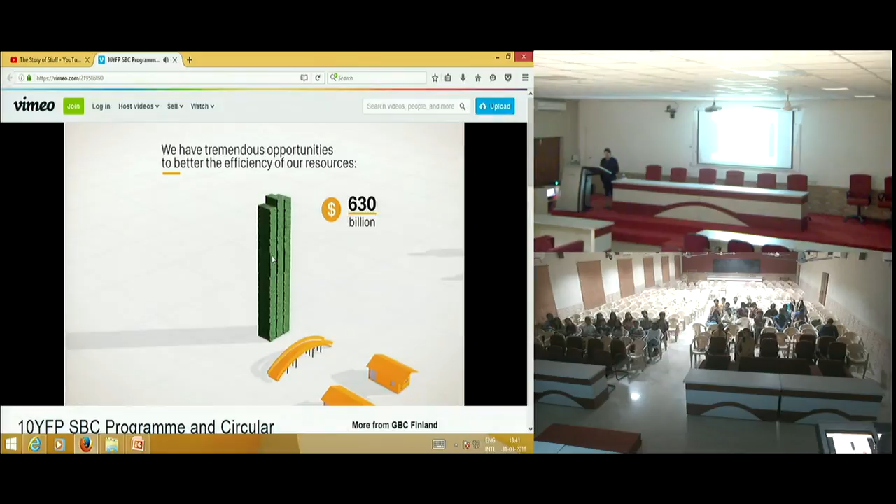10 to 15% of building materials are wasted during construction. 60% of European offices are not used even in working hours. 50% of residential dwellers report living in too much space. 20 to 40% of the energy used in existing buildings could profitably be conserved. 54% of demolition materials are sent to landfill, while in some countries landfill is only 6%. And 40% of all extracted materials are stored in the built environment, which provides an enormous reservoir for reuse and recycling. EU manufacturing could realize net cost savings of up to $630 billion annually in raw materials by deploying a circular economy approach, and applying circular economy principles could significantly enhance the productivity of the global construction industry, saving at least $100 billion a year.

The Sustainable Development Goals of the SBC program are to achieve a healthy built environment, provide capacity building to different stakeholders, increase water use efficiency, ensure access to affordable, reliable and modern energy services, improve resource efficiency, promote sustainable industrialization and foster innovation, support job creation for all genders and the youth, enhance the planning and management of sustainable human settlements, encourage companies to adopt sustainable practices, strengthen resilience and adaptive capacity, restore degraded land and ensure sustainable use of ecosystems, and finally, build on initiatives for knowledge sharing and cooperation.

Our vision is a local circular economy: analyze global material flows to inform local networks and design buildings for material recovery, lower the cost of waste separation, replace energy-intensive materials and save raw materials, protect the informal sector and encourage the use of organic building materials. Invest in local circular economies and divert materials from landfill, raise the value of reused materials and improve the prospects for the informal markets.

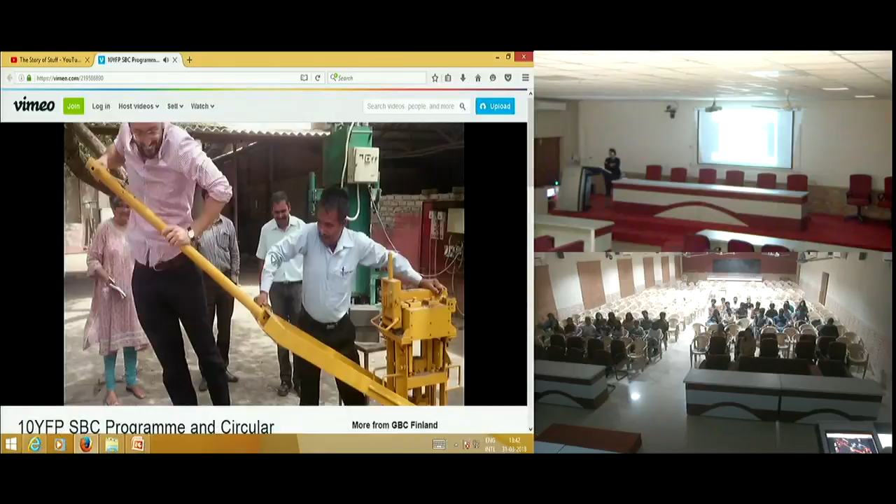A good example of using side streams from other industries in construction comes from India, where fly ash is used to make building products for walls or pavements. Machinery of different scales is available for startup companies. The Helsinki Maapörssi in Finland is an online recycling service to facilitate and coordinate the direct exchange of demolition aggregates and ground-fill materials. In Malawi, the use of traditionally fired clay bricks can now be substituted with a more environmentally friendly eco-brick, manufactured with vertical shaft brick kiln technology, which reduces the consumption of firewood and deforestation. Visit our SBC program website for more information and get in touch.

Okay, so I hope you found that video useful. Now coming back to the built environment, as you saw in the video quite clearly, we do need the built environment, and I said this before, we do need the built environment for resources that we use, and then we tend to put our waste back into the built environment as well.

And in the process of putting waste back into the earth, we could contaminate things. You know, there's air pollution, there's water pollution, there's pollution to the soil. So in other words, we also need to be careful about the sorts of materials that are going back into the earth. And when you look at particularly in urban areas, and particularly in countries like India, the pace of change, the urban growth that's taking place is unprecedented.

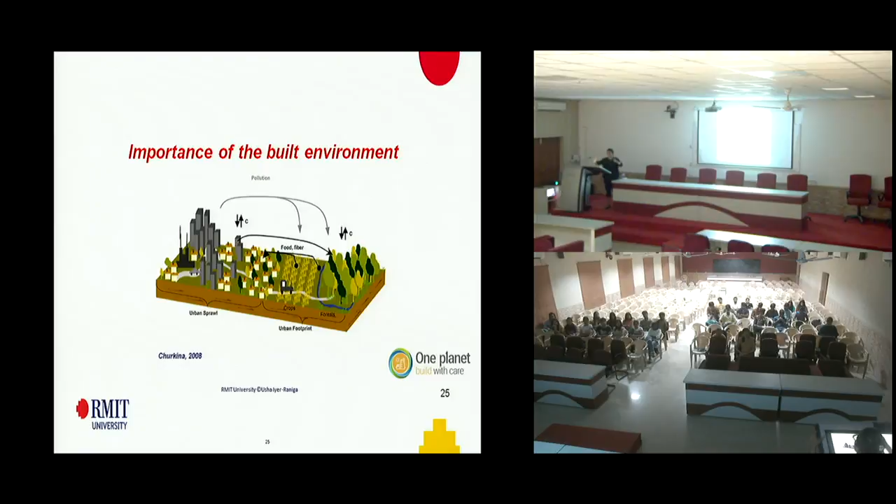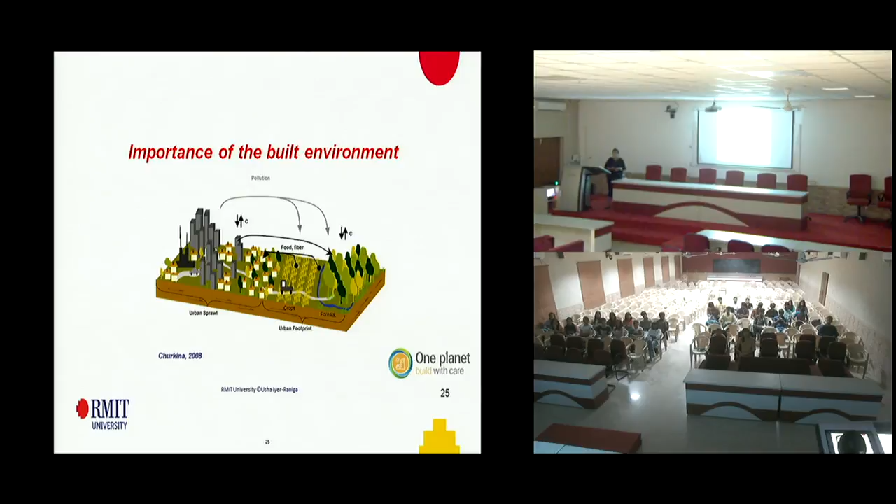also maintenance, because buildings need to be maintained over a period of time, like you might give it a lick of paint, you might need to change your roof tiles, there's a number of things that you do to the building. So this whole process, the total life cycle needs to be much lower than what we have traditionally been using over a period of time. So if in this process we can try and bring back the principles of circular economy, then we will all be winners in the process. So I hope that's clear to you.

So that is why there's a lot of focus now on cities, because if you look at the population of the world, nearly 7 billion people on the planet, about 50% of people, particularly in countries like India, China, Brazil, Mexico, Philippines, if they're not already living in cities, they will be, and particularly the Asia Pacific is going to be where 50% of the world population is going to be living by 2030.

So there's a huge focus, therefore, on how do we build cities. And that is why we need to start thinking about the principles of incorporating sustainable development into what we do. So let me now show you very briefly about India's commitment to the Sustainable Development Goals.

And I want to bring you back to something that is not new in India, and that is Gandhi's comment, which he made many years ago, where he said, "Earth has enough resources to meet people's needs, but will never have enough to satisfy people's greed." And unfortunately, the developed countries in this world have followed the path of people's greed rather than people's need.

And so we are now in the situation where, if you get an opportunity to see An Inconvenient Sequel, the sequel of An Inconvenient Truth, you can see in the movie how countries like India have negotiated very strongly to ensure that they have the opportunity to continue to grow, but at what cost, and how do we achieve that growth without damaging the environment on a permanent basis.

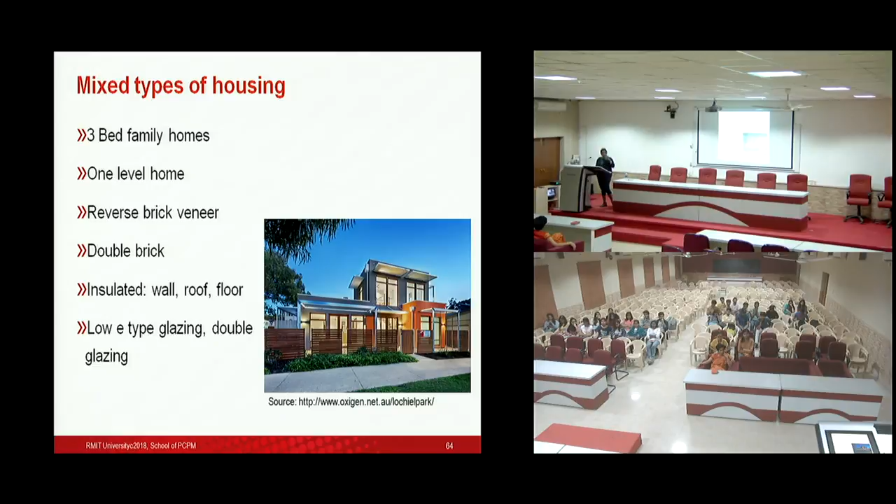They also use low E glazing, so that the window itself doesn't absorb sunlight, particularly in summertime. And a lot of double glazing was used. So again, that keeps the heat in during winter time.

Here is another example of what is called Josh's house. So I have to explain this to you a little bit. So Josh became a celebrity on the national broadcaster, ABC, the Australian Broadcasting Corporation. We have got ABC radio, we've got ABC television. And so he became committed towards sustainability, and he wanted to build a house. So the whole process of him building this house and monitoring his house became a television series.

So he went to a NatHERS 10 rating, and then he used natural light as much as possible, so he didn't need to use artificial lighting during the day. And he used LED fittings in his house, and then he used energy metering and other savings. So the typical energy use of Josh's house was about 1,000, or maybe even less than that, whereas a standard Perth house was about 9,000 kilowatt hours per year.

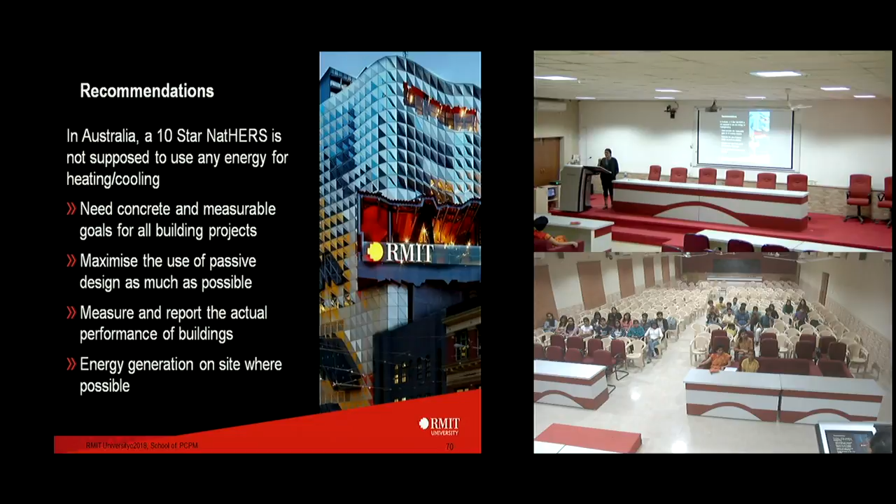And wherever possible, try and have energy generation on site. I also want to show you this project called Nightingale, which is a fairly recent project where one of my colleagues was involved in. Housing affordability is a huge issue in Australia.

And the price of housing has increased so much, particularly over the last 10 years, that a lot of young people who are earning money are just not able to get into the housing market at all, because on an average the cost of a house should be about 3 times a person's salary, right? So the average salary in Australia is about $60,000. So 3 times that should be $180,000. So say $200,000 should be the standard cost of a home.

Now you saw already in Josh's house, which he built, where are we, 2018. So he would have built his house at least 6 years ago, maybe even earlier than that. And it was already about $400,000, say about $380,000. So even 6 years ago, and Perth is much cheaper in terms of housing compared to Sydney and Melbourne.

So now a typical average home in Melbourne, and when I say an average home, I'm not talking about a flat, I'm talking about a 3 or 4 bedroom house, is going to cost you, if you're looking within the inner suburbs, so about say 10 kilometers from the central business district, about $1 million, $1.5 million. That is clearly unaffordable for somebody who's on a $60,000 salary.

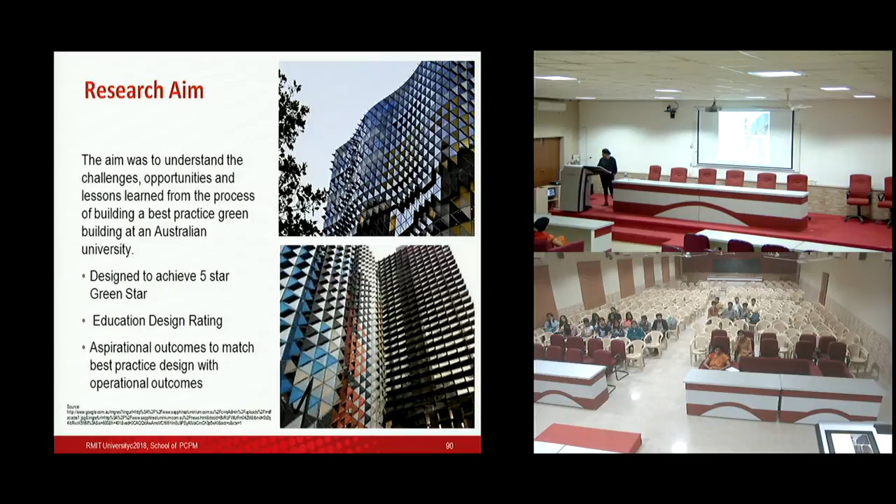So we used a case study methodology, and it was a mixed method. So we used quantitative data as well as qualitative data. So in terms of the quantitative data, we measured the building. We also had a building management system, so we cross-checked that. We actually also put in physical measurements, so we put HOBOs, and we looked at lighting, we looked at the temperatures, a whole range of different things, relative humidity, all of that. And then we also looked at how people felt in the building.

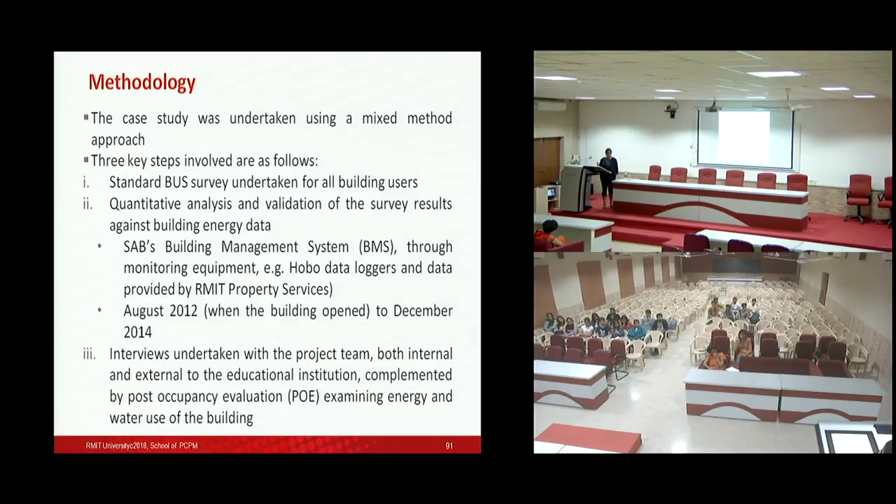So we used what is called a BUS survey, a building user survey, and we also undertook interviews with the project team, because we wanted to know what they were thinking and whether they felt the building was successful from their perspective or not. So we did semi-structured interviews with 17 different people, the architect, the project manager, etc. And with the building user survey, we did not use students, so we did not engage with 6,000 students for a number of different reasons, which I won't go into. But we thought that we would look at the permanent users of the building, which are the staff and higher degree by research students, because they're usually there.

They're meant to be there only for 3 years, but they usually stay there for 5 years. We initially sent out soft copies to people, but we found that the response was very poor. So we then gave them hard copies, and we had about a fifth in terms of the response rate.

We also looked at the utility data. So what was the energy spent? What was the water use in the building? What is the gas use in the building? And so we then triangulated: the BMS data, our own data, utility data, and then we also spoke to property services.

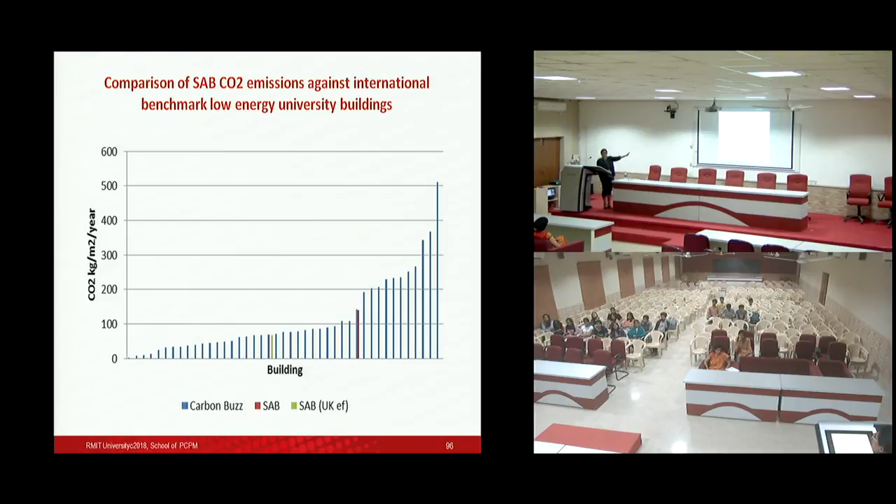So in terms of water consumption, it had 61% lower water consumption compared to other RMIT buildings, but still not meeting its Green Star target. From a greenhouse gas emissions perspective, it was 3.5 times higher than the predicted rate. So as you saw, the energy was not what was either in terms of its design intent or even what it was as far as Green Star was concerned.

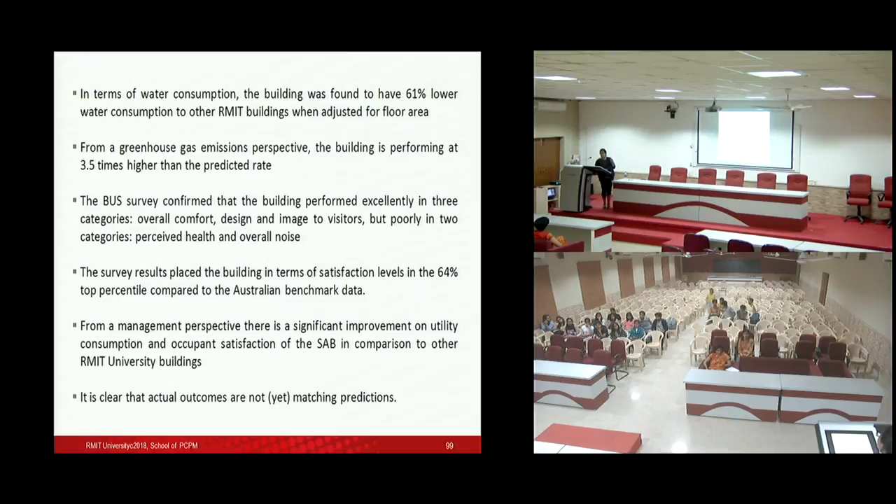I've already talked about the BUS survey, so some areas were good, some areas not so good. In terms of the satisfaction levels of the building, compared to other buildings in the Australian benchmark, it was at the 64th percentile. So it didn't do too bad, but it wasn't really that great. From a management perspective, lots of little things that happened in the building needed to be fine-tuned over a period of time. So clearly, we did not meet the design intent of the building.

From the interviews, what did we find? We found that one of the main reasons for the support that the building got was because there was support from the Vice Chancellor at that time from the university. The Vice Chancellor was really committed to sustainability, and made sure that in terms of the design of the building, in terms of all the sustainability benchmarks that we try to achieve in the building, that support came from the Vice Chancellor. So the top-down support is very important.

At the same time, it is very important to be very transparent about what these design criteria are that we're trying to measure, what these outputs are that we're trying to measure. Because of the way the contract was structured with the guaranteed maximum price contract, the architects, the engineers, the consultants, the project managers, all were part of the one team, because as I said before, they shared the success, but they also shared the liability.

So the ownership of ensuring that the design was well done, the documentation was well done, the construction of the building was well done, actually supported the building to be completed 108 days ahead of schedule. So that ownership and that relationship that was built was very, very integral.

The fact that we did not look at performance right at the start, and we had some very unrealistic ideas about making it even lower than Green Star, was obviously not achievable. So this is something to think about, and therefore a performance intent really should have been built in from the start. So the disconnect between the actual performance of the building and the design performance is a very important gap that needs to be addressed.

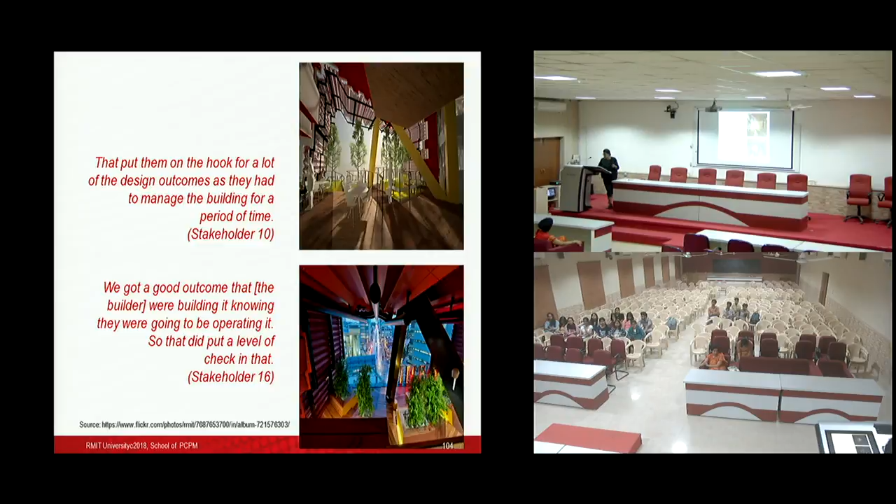Okay, so I'll skip over the conclusions. But I want to talk about this because I think this is really important for you. So when you're thinking, and if you are learning already about sustainability, I want you to move away from just learning about it to practicing it. So I want you to move away from learning about sustainability to learning for sustainability.

Seeing people as a problem to seeing people as agents of change. And we talked about how can you try and bring your clients in. So don't see them as being a problem, but if you convince them and you work with them, they can actually be your agents of change. And they can support you in your own cause. So moving from single actions, think holistically and think about how you can continue to build and learn for change. Move the focus on individual and personal change to structural and institutional change.